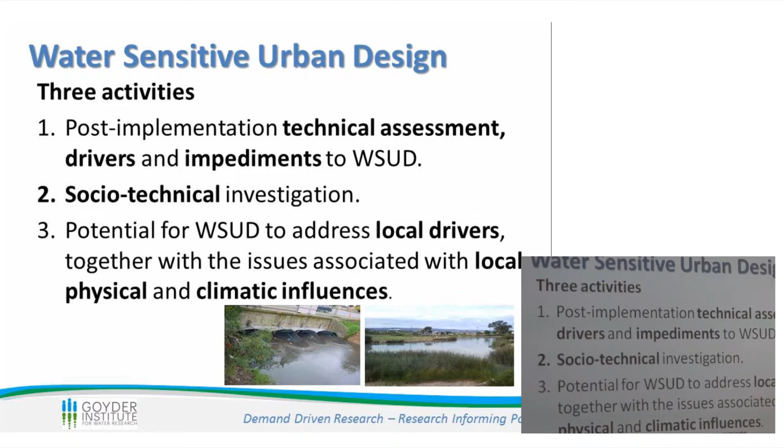This project has three main activities. Looking at the post-implementation assessment of the existing development based on water sensitive design, identifying the drivers and the impediments. Socio-technical investigation, going back to the community and asking what issues they think about the systems. And the third is looking at the potential of WSUD based on the local drivers and also with the local physical and climatic influences. So this is what we are covering, and I will be putting some information about these activities. Basically, we are looking at multifunctionality, water conservation, flood mitigation, and the water quality aspect.

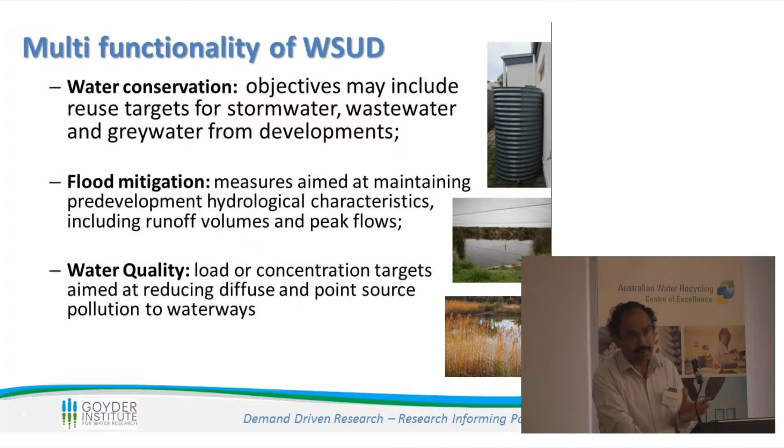In task one, we developed an inventory of what type of systems are there in the Greater Adelaide region, and whether these systems are working as they're designed for, and asking about the impediments from conceptualization to maintenance and operation, and then also mapping the various stakeholders for water sensitive urban design systems. In the first part, we investigated around 202 WSUD systems, and we have mapped them in a GIS form that will be available through the web. We are talking to the NRM board to put that on the web. So that has already been done. A report has been developed, and that is also available on the Goyder website.

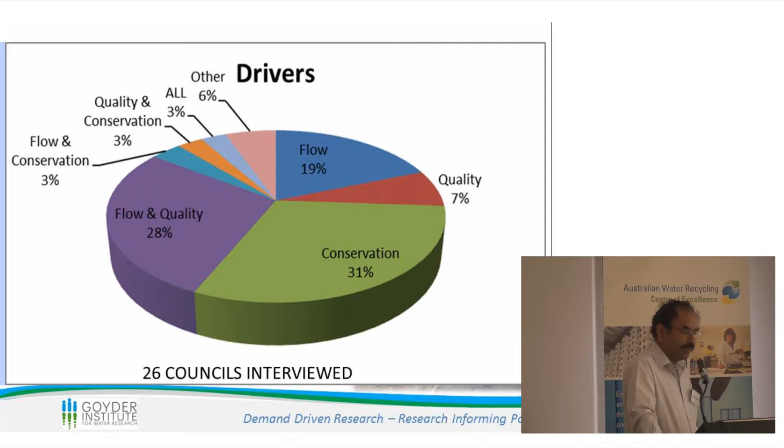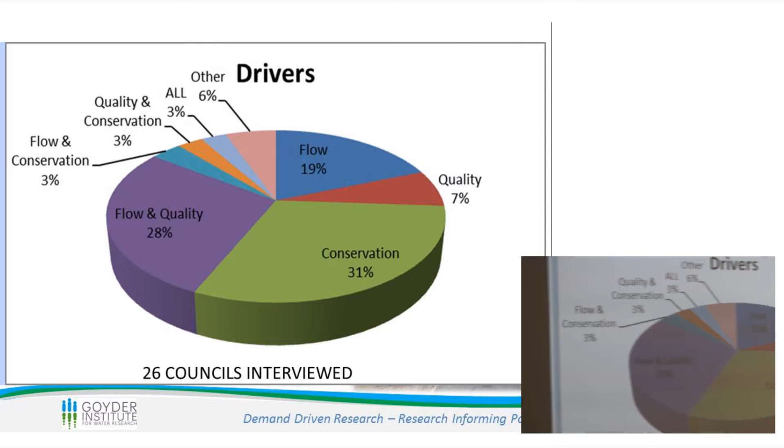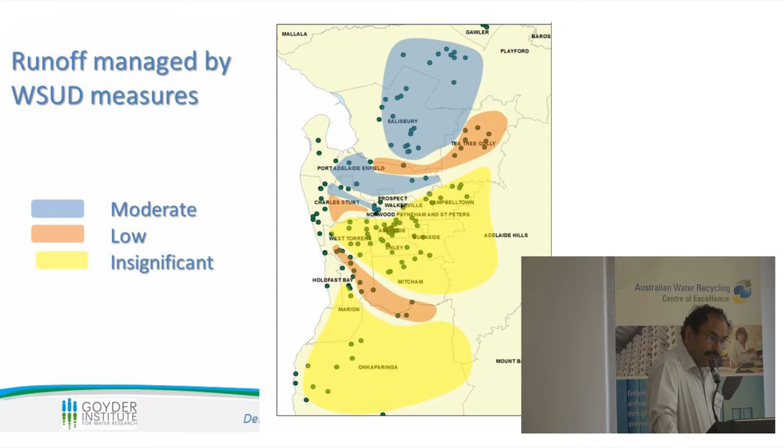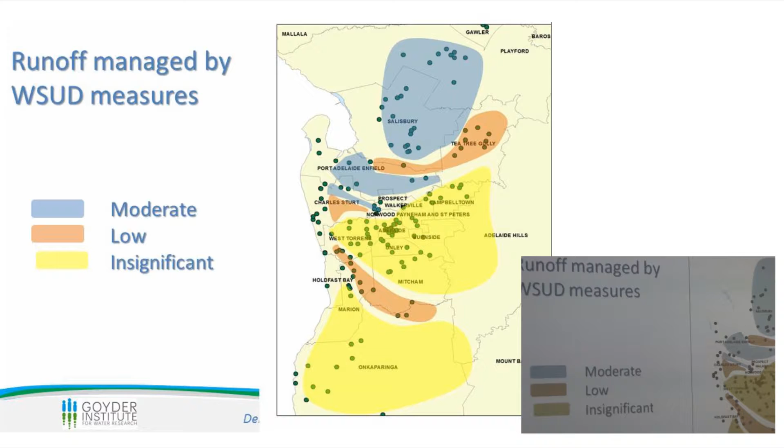We tried to put it on a map based on the number of WSUD measures which are already there, and where these systems are making more impact on the runoff. And you can see on the top, the dark one is the Salisbury area, where most of the schemes are for stormwater reuse. To do the post-implementation assessment out of those 202 sites, we developed a number of criteria, and based on that, we selected 6 sites to cover various aspects of WSUD systems. And these sites were also used for the socio-technical investigation.

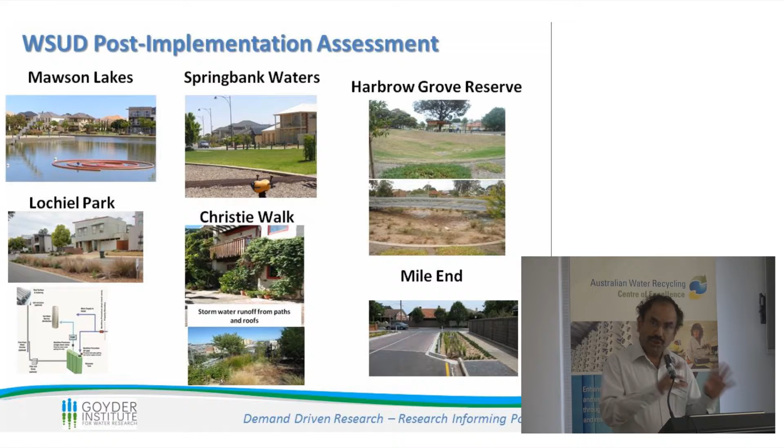Also, we talked to the various stakeholders and developed a mapping of who are the primary, secondary, and tertiary stakeholders. As you can see over here, the residents should be the primary stakeholders. But in the greenfield areas which are developed, there is no community there. The decisions are taken by someone else. That's why we went to those communities and checked with them what they feel about those systems.

We are in the process of finalizing a report on task 1, which will be around 250 pages. We have categorized all the impediments and constraints in 6 themes. I won't be going through all the 6 themes over here, but that report is almost ready to be circulated among the project reference group members within a week or 10 days' time. That will cover themes like adoption and implementation issues, the fragmented approach, the knowledge gaps, the perception of risks and cost, and what the community is thinking. From task 2, we have brought that into task 1 to make it a complete picture. So that report is almost ready and will be circulated very soon.

Task 2 is about understanding the perceptions and the drivers that the community thinks about these systems. So we went to those 6 development sites locally, and through focus groups and talking to the community, we have developed a report.

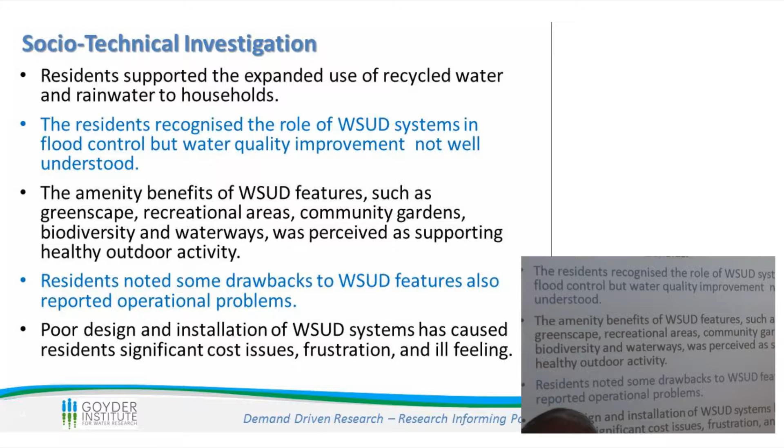That report has been reviewed by the project reference group. It is with our steering committee members, and hopefully that will be in the public domain very soon. In this report, we are talking about the community, what they think about it. They have an understanding about the system.

They are supportive of water recycling and rainwater usage, but they also understand the amenity values of these systems, and they recognize some aspects of water sensitive urban design, not fully. Especially they know the flood mitigation part, not the water quality part. But they are talking about a number of issues, and those issues are more about operation and maintenance. And also they are talking about design and installation, because they are looking at the system on a day-to-day basis.

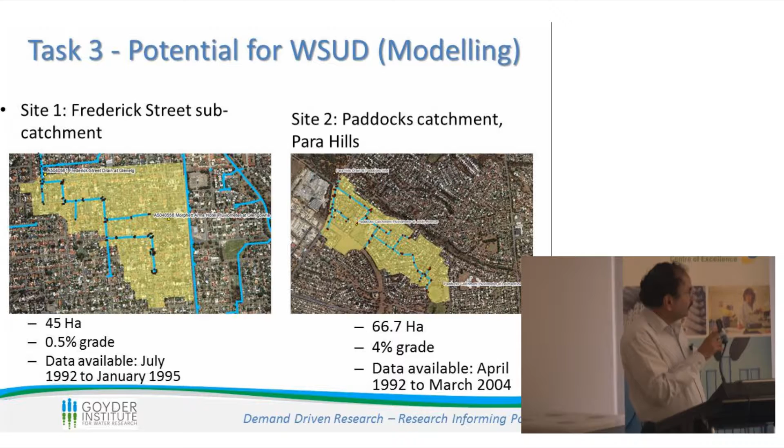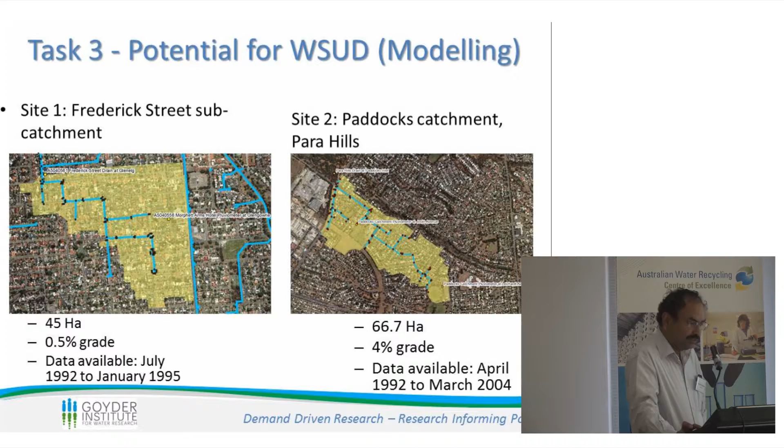The third activity is about understanding the potential of water sensitive urban design, and this is a modeling exercise. We considered 2 developments locally, and we picked the Frederick Street catchment and the paddocks because we have some runoff data about these sites, and we developed the whole methodology for how to investigate the potential. And just to show 2 results, because we are investigating a number of options.

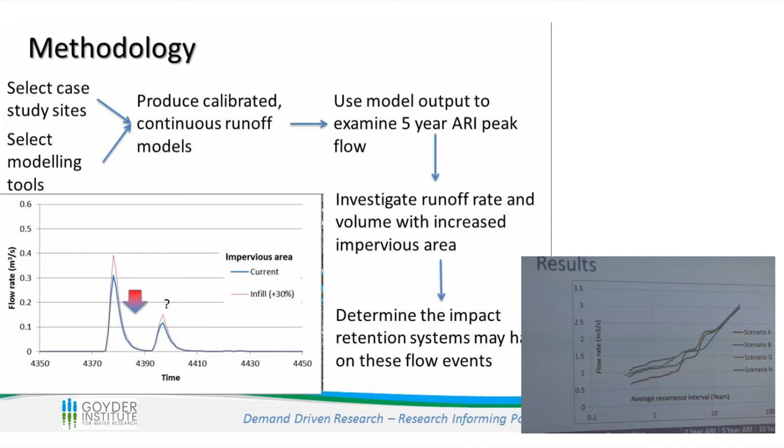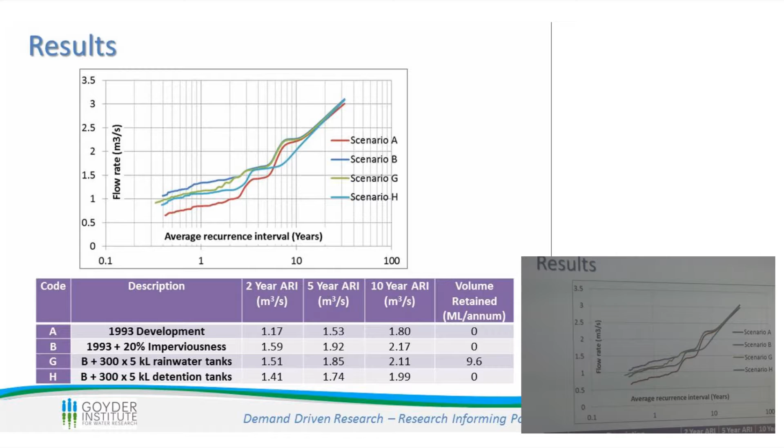Just two options. We looked at rainwater and detention tanks to reduce the peak flows to pre-development flows. The rainwater tanks have the additional benefit of water conservation, but detention tanks are more successful in reducing the flows. Just to show you the performance assessment of some of the bioretention systems, they are good in the water quality aspect, reducing suspended solids, TP and TN. They can also reduce the peak flows at various ARI levels, and they can be good combined with the bioretention system, and that can provide water quality that can be more suitable to MAR.

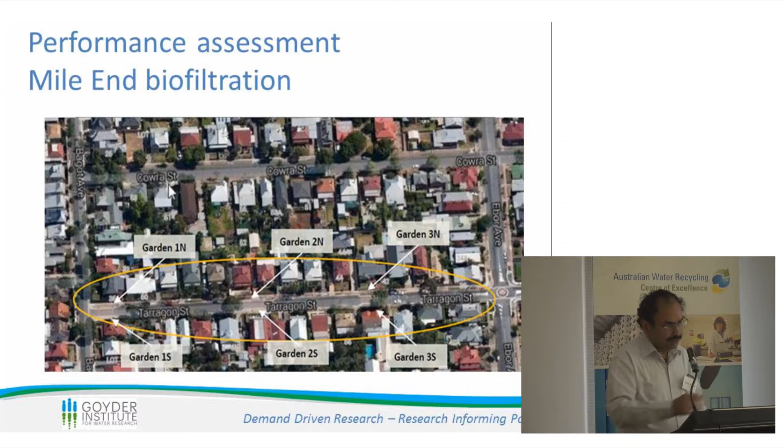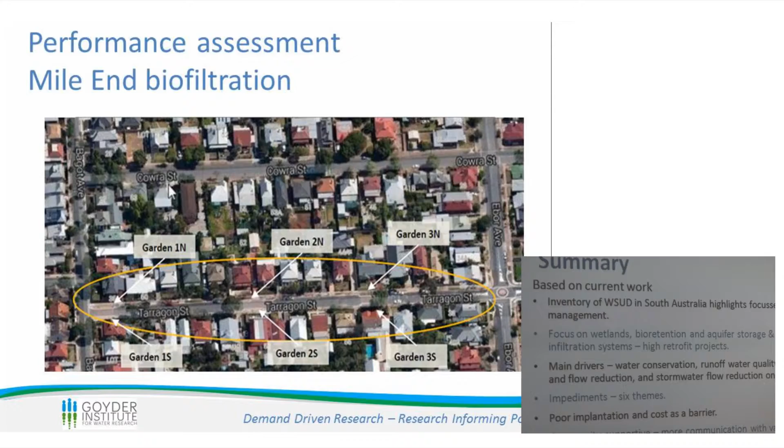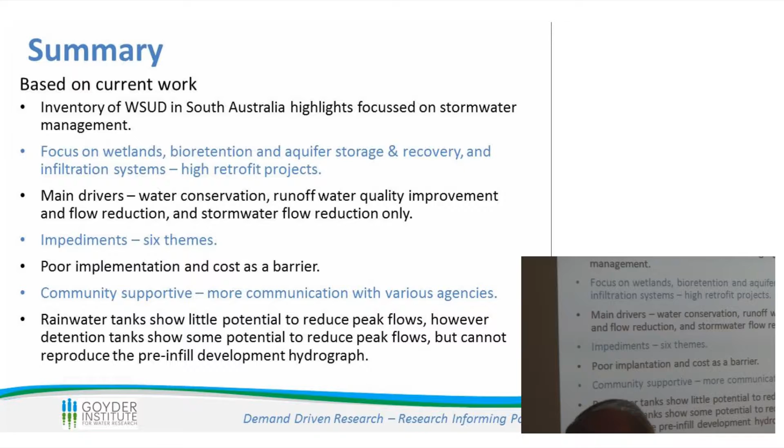In summary, what we have done so far is develop the inventory and identify the drivers, and also identify which systems are being more applied, used and implemented. We have identified the impediments, talking to wider stakeholders, and we have put them in 6 themes. The most important ones are poor implementation and cost as a barrier. The community is supportive, but they need much more information to be educated.

And through the modeling, I think we can say at the moment there are a number of options we investigated, but just for example, I have put over here the rainwater tanks, and detention tanks are more successful in reducing the peak flows, but there are other options too which we are investigating at the moment.

Based on the wider consultation and identifying the impediments, we realized that there are a number of activities or support needed for professionals and local councils, where they can have guidelines for incorporating WSUD into stormwater management plans. There is limited information about how runoff can be reduced. So there is more need for understanding the evidence base on the impact on flooding, runoff, and water quality.

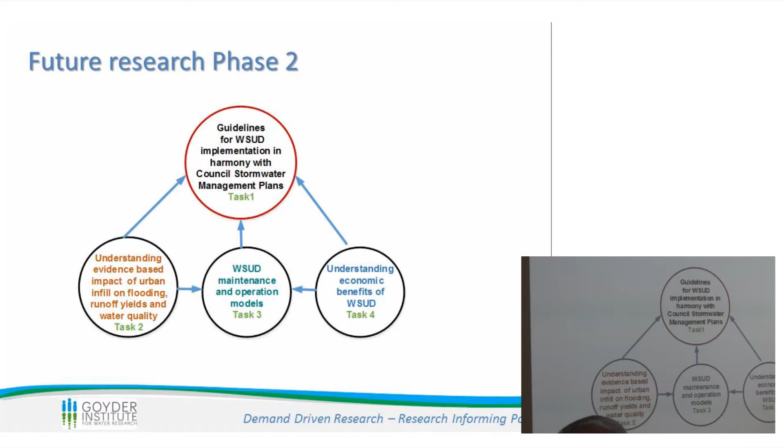The operation and maintenance issues of WSUD are the most important aspect, and we need to understand what models would be more suitable for operation and management, and also to understand the economic benefit of WSUD. So these are some of the activities which we think, based on the wider consultation, will be needed to increase the uptake of water sensitive design.

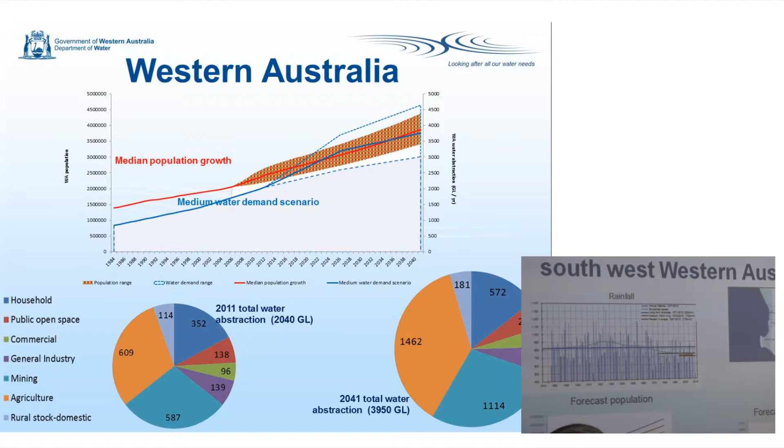And the other driver, in the southwest of Western Australia in particular, is not only that population growth and forecast water demand growth, but we've got a definite drying climate where it looks like every 10 years or so the inflows into storage halve, or the recharge is substantially reduced. And the work that's been done by the Bureau of Meteorology and CSIRO and ourselves looks like that trend's to continue. So that's some of the background and some of the driving forces that we have in WA.

So to lead us through some of the elements of that, first of all, we'll have a presentation about the good. There's been some really excellent work done by the Western Australian Water Corporation in groundwater replenishment, and we're very fortunate to have Rino Trolio here from the Water Corp to take you through, because he's been heavily involved in this groundwater replenishment trial and in water recycling for the Water Corporation. I'm very pleased to introduce Rino.

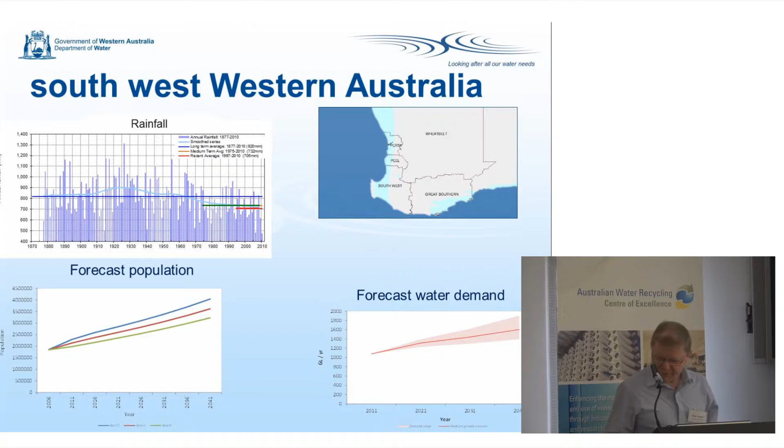All right. And Greg, I've never been introduced as the good stuff, so I appreciate that. I'll have to tell my wife about that.

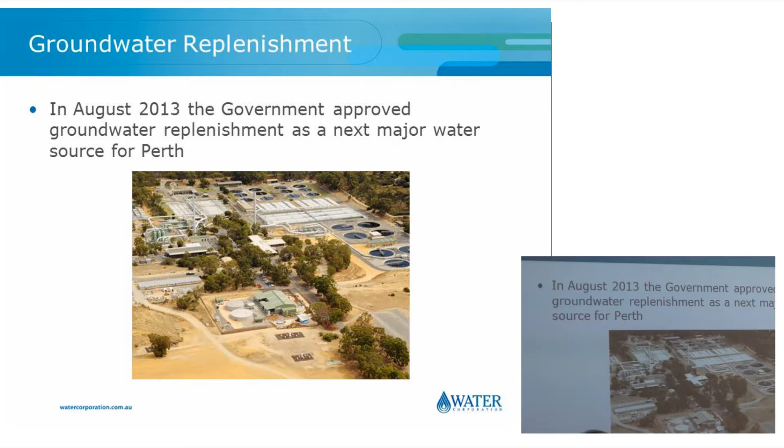So today I'm going to talk about the groundwater replenishment trial, and I'm going to take you through that 3-year journey, but also introduce to you that this is going to be our next source for Perth, Western Australia. So we're really excited in the West. Just to recap, in August last year we all celebrated that the government approved groundwater replenishment as our next major water source for Perth.

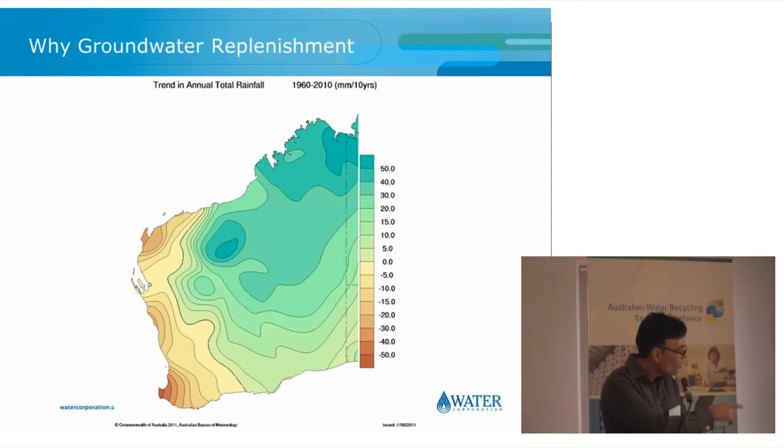Now, why do we want to go down to groundwater replenishment? As Greg showed in his previous slides, Perth's a drying climate. The map of Western Australia shows average rainfall between 1960 and 2010, and there's been a reduction in rainfall. In the southwest corner of Western Australia, rainfall has decreased by 30 to 40%. This was further accentuated by the winter of 2012, the second lowest on record.

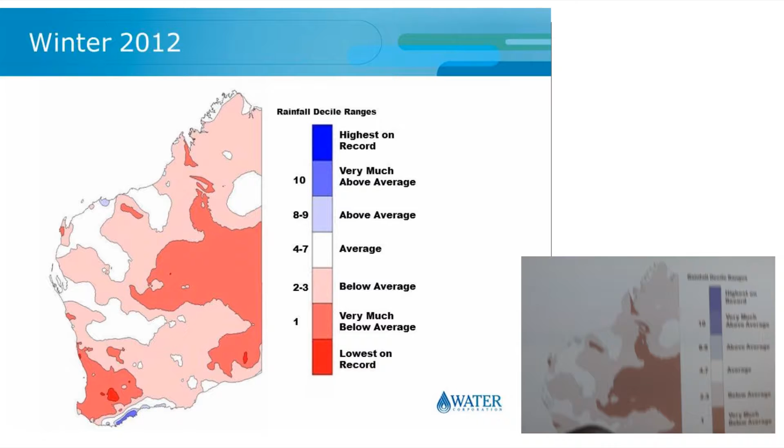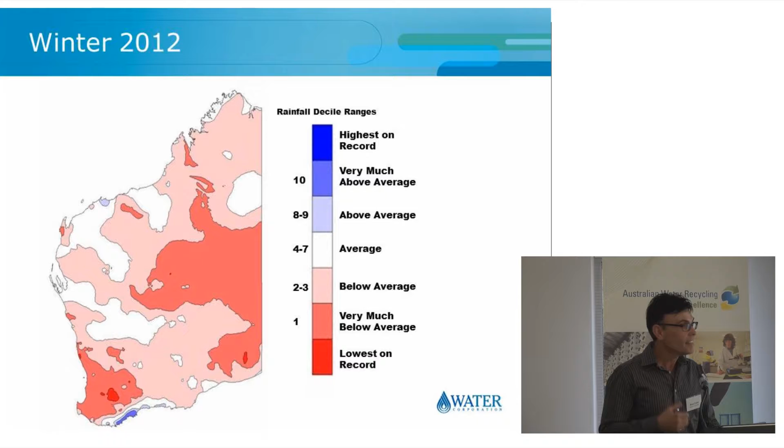Again, the map shows that rainfall has been below average, and in certain parts of the state, the dark red, it was lowest on record. This was followed by the driest winter, which was 2010. And I was just reading an article the other day that we've had the driest summer on record in Perth this year. So we haven't experienced the rain that some of you have had in the past 12 months. So we're still in a drought.

So what do we do in terms of planning? How do we move forward? Following those continued poor winters, we revamped our planning, and we've captured that in Water Forever, whatever the weather. That's our planning for the next decade to really drought-proof Perth, and it's available on our website, www.watercorporation.com.au.

So if you look on the left-hand side, what does the plan consist of? Reducing demand by a further 15%, so reduced water use. Recycling 30% of our wastewater by 2030, so taking treated wastewater and recycling it. And developing new sources. Bringing those three concepts together, we're becoming a climate resilient state. And one of those new sources is groundwater replenishment.

So what does groundwater replenishment consist of? I'll walk you through. It takes treated wastewater from our wastewater treatment plant in the northern suburb of Perth known as Craigie; the plant is Beenyup wastewater treatment plant. We take that secondary treated wastewater from an activated sludge plant, and it goes through an advanced water recycling plant. From that, it is now drinking water standard, and we recharge it into a confined aquifer known as the Leederville aquifer, between 120 and 200 metres in depth.

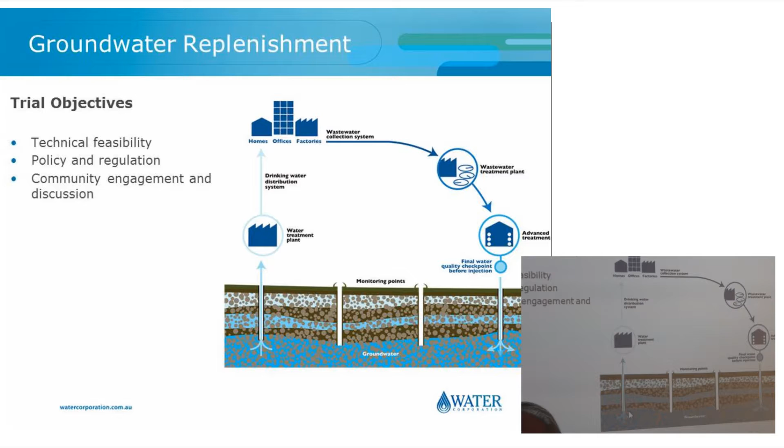Then over time, so over many decades, it will travel through the aquifer and find itself through our existing production bore, which is about 5 kilometres from the actual recharge point. It then goes through a water treatment plant and then into the distribution system. So that's the concept.

So in terms of the trial objectives, there were 3. One was to develop an appropriate regulatory framework with our regulators. And we've got a good relationship with our regulators, being the Department of Water, the Department of Health, and the Department of Environment Regulation. Prove the technology. We had confidence with the technology because it's been used elsewhere in Singapore and California. But our challenge was, can we bring the community along this journey? Will they get over that yuck factor?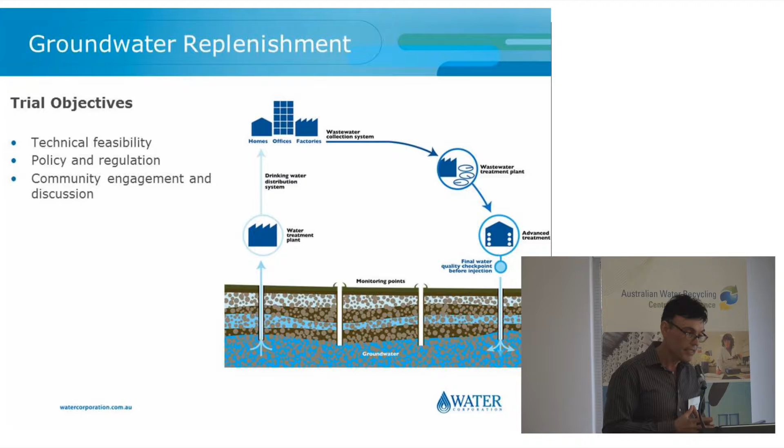So just to go through the dates of the trial, we're now focusing on the 3-year trial. In 2004, we commenced engagement, but it was in 2009 that we commissioned the plant. So it's important to engage with the stakeholders and our regulators. The Department of Health undertook a very sophisticated and extensive scientific review of approximately 400 chemicals of concern. We wanted to know what we need to analyse in terms of chemicals of concern, and could the treatment process remove those chemicals of concern. We spoke to community leaders and the community at length to get their support.

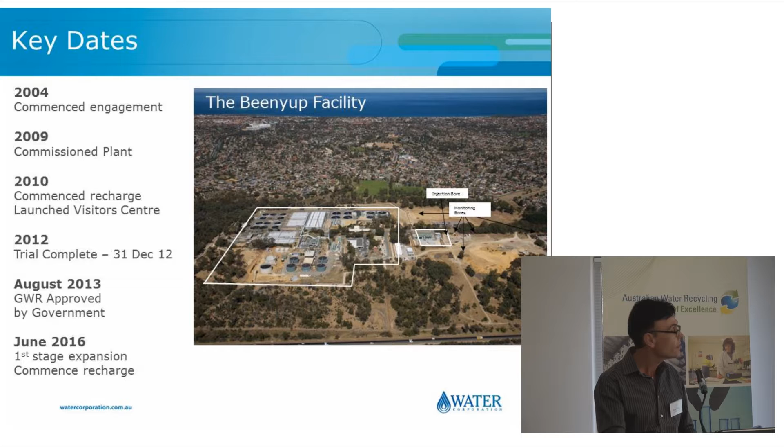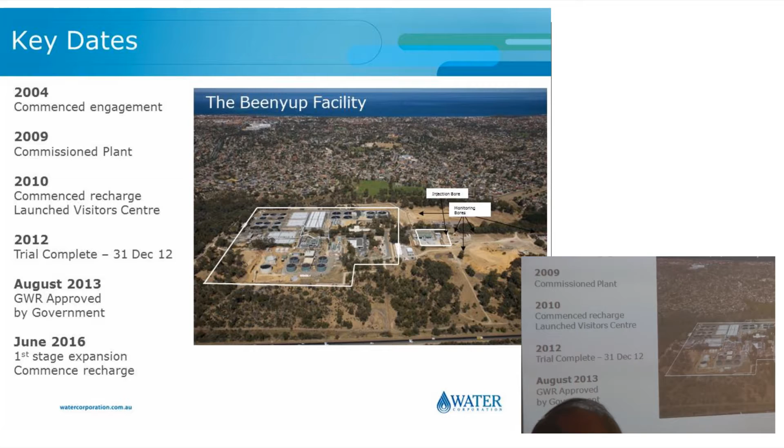So just to walk you through those key dates, we commissioned the plant in 2009. We commenced recharge in 2010, and we launched our visitor centre. Some of you who attended Ozwater in Perth would have gone through the visitor centre. The trial was completed on New Year's Eve, the 31st of December 2012, and there were great celebrations. As I said, the government approved groundwater replenishment as our next source in August 2013, and we'll commission our 7 gigalitre plant in June 2016.

So in terms of the plant, what does it consist of? As I said, we're taking that treated wastewater from Beenyup. It goes through an advanced water treatment process. Initially ultrafiltration, which removes all your suspended solids, your crypto and larger viruses. Moving over to reverse osmosis, which removes chemicals larger than a water molecule. And then finally UV disinfection, that's ultraviolet treatment for your final disinfection step. It inactivates the DNA within the bacteria and viruses. It's then stored in a treated water storage and then recharged into the aquifer.

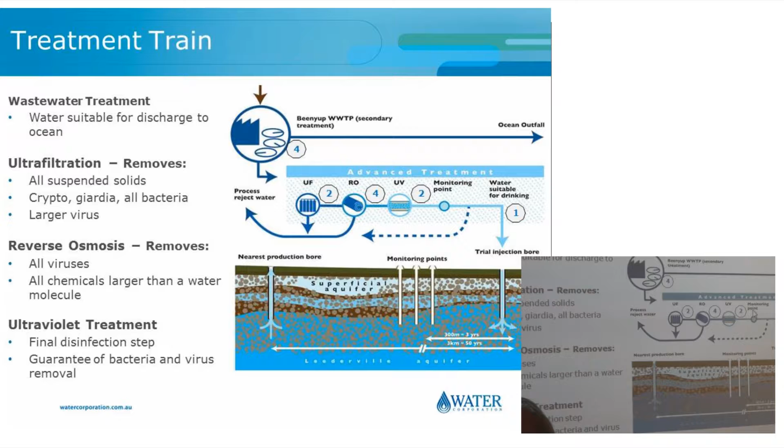So in terms of the treatment process, we have 11 log removal. We're claiming 1 from the wastewater treatment plant, 3 from the UF, 3 from the RO and 4 from the UV. So that equates to 11. And we've done some challenge testing along the various treatment processes. For example, with the RO, we've taken a chemical surrogate known as rhodamine dye, which is much smaller than MS2 coliphage, and we challenge tested the RO, and we were able to show that the log removal was greater than 3. It was about 3.5 to 3.7.

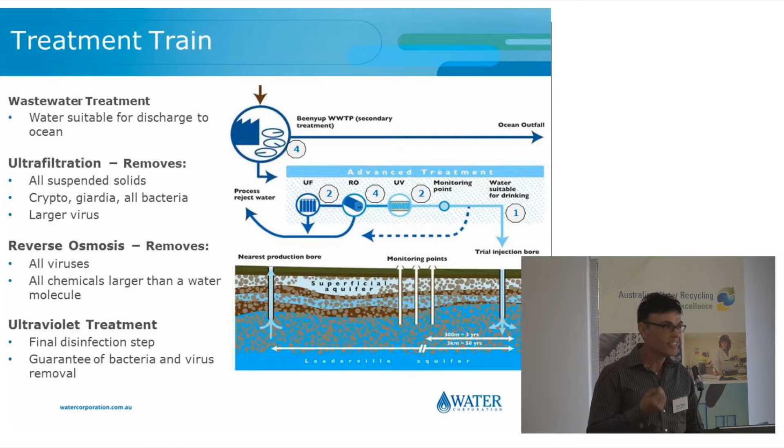So once the water is injected in the ground, of course, you're going to need to take samples to verify that all is safe. In terms of the verification of your recycled water quality, just to walk you through some of the numbers, we took 11,974 parameters through the advanced water recycling plant, 4,104 samples from the recycled water, from the treated water storage tank, that's your regulatory samples, and over 58,000 samples from the bore field. All of these samples met health and environmental guidelines. The cost of the analysis over the 3-year period was 2.7 million.

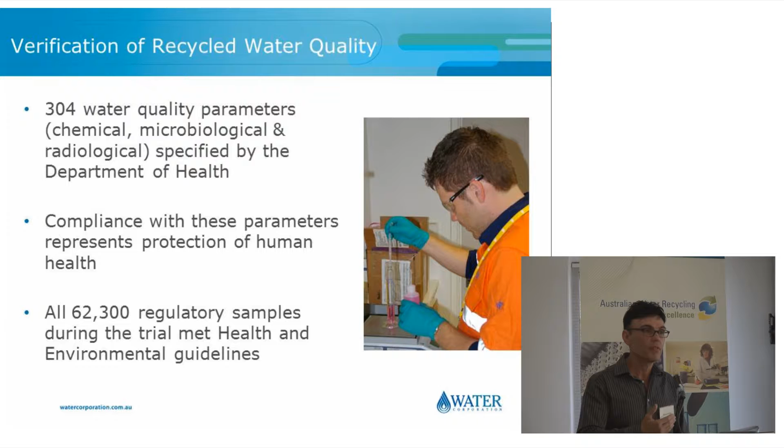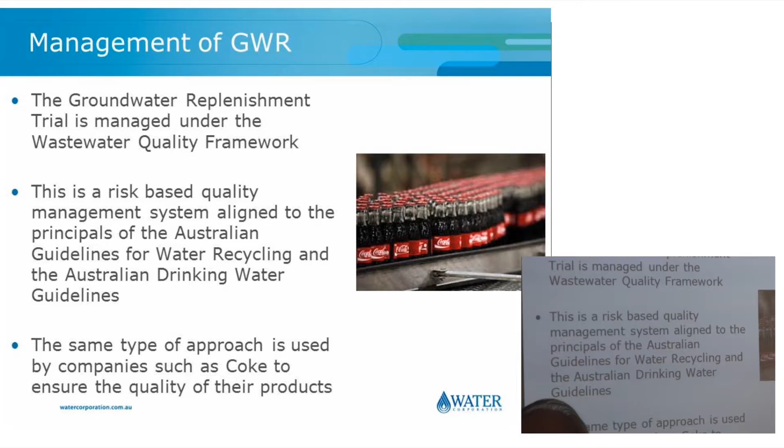So how do we manage groundwater replenishment? What is the governance of groundwater replenishment? We manage it under the wastewater quality framework. So what is it? Well, it's based on the 12 elements of the Australian Drinking Water Guidelines and also the 12 elements of the Australian Guidelines for Water Recycling. We're managing groundwater replenishment through a framework or a quality system, quite similar to what's managed in the food industry, such as Coca-Cola. The wastewater quality framework has been endorsed by our regulators as the industry best practice approach for managing groundwater replenishment. It was also audited by an external auditor, Deloitte, and we passed with flying colours.

So, as I said previously, the only thing that would stop us from getting support from government was community acceptance. So really a vital part of getting the project up was related to the attitudes of the community. And in terms of the community engagement, and I can't stress the importance of this for any of your schemes, our first level of engagement was with opinion leaders and decision makers. We developed a sophisticated and extensive program to identify and engage with stakeholders who are likely to have influence or interest in groundwater replenishment. Now, we commenced this in 2004.

The briefing programs also focus on 2 areas: your regulatory authorities, so your decision makers, and opinion leaders. So our regulators, such as the Department of Water, took account of community attitudes, ministerial direction, and also the industries that are related in providing that direction. MP briefings were undertaken regularly to ensure they were informed when members of the community may go to them with concerns. So we answered hundreds of ministerials and priority runs along that three-year trial.

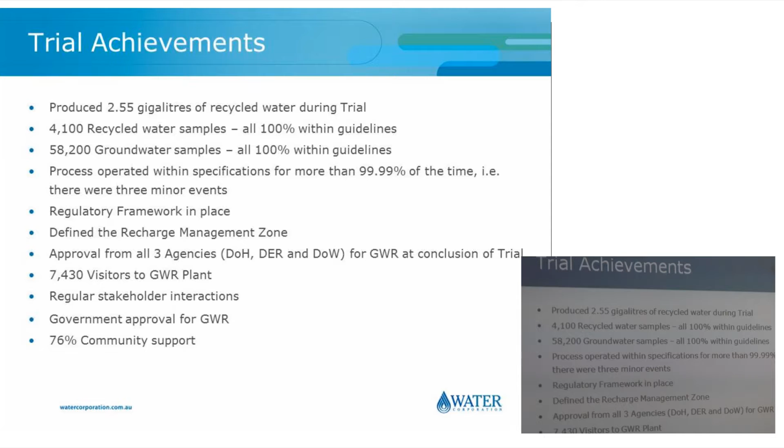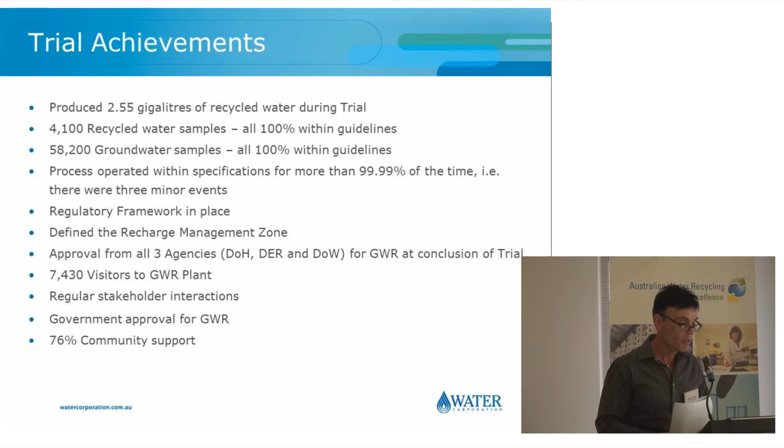So in terms of the trial achievements, what do we achieve? So that's the good. So we produced 2.55 gigalitres of recycled water during the trial. We met all the health and environmental guidelines. We got approval from all the three agencies. We had over 7,400 visitors to our groundwater replenishment plant, regular stakeholder interactions, and bipartisan government approval for groundwater replenishment. So as I said, overall there was about 76% community support for groundwater replenishment within Perth, and that was, of course, due to the drying climate.

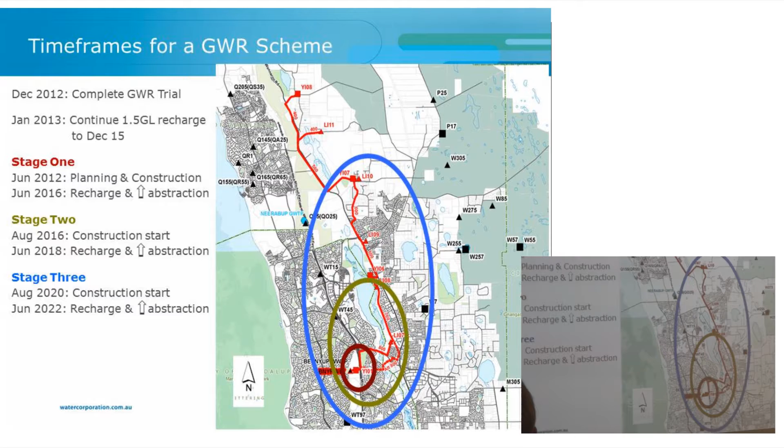So moving forward, what's our next stage? So as I said, in 2016 we'll commission our 7 gigalitre plant. We're looking at stage 2 and stage 3, so that's probably 14 and 28 gigalitres. Staging can be accelerated or deferred depending on the rainfall events. So the aim is by 2022, if necessary, we can be completely climate independent in Perth, Western Australia.

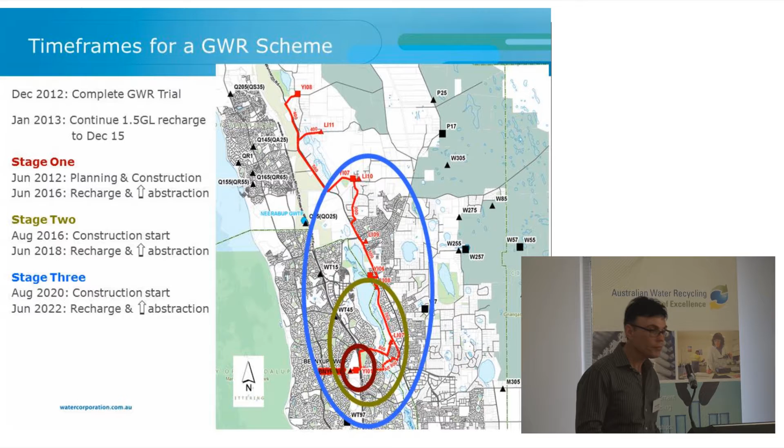Thanks, Rino. And we move straight on to the second presentation, where this is Dr. Don McFarlane from the CSIRO. Whereas Rino spoke about the successes that have been had, particularly in drinking water as being the main use of the water, Don's work is where the main use of the water will be in heavy industry and also hopefully keeping out seawater intrusion risks. And so over to you, Don. Thanks, Rick.

Okay, I'd like to acknowledge my co-authors here as well, including Michael Donn, who's in the audience, and he can answer a lot of the chemical questions if I can't. Just up here on the screen, though, you can see the heavy industry area in Kwinana, which is just south of Perth, south of the Port of Fremantle. This is an area that's, apart from the Burrup Peninsula, the major heavy industry area in Western Australia, and it's experiencing, or going to soon experience, a shortage of water.

About 70% of their process water particularly comes from the shallow aquifer, and the groundwater levels have been falling, seawater intrusion is occurring, and there's other impacts of those falling levels as well, including a lot of the wetlands on the coastal plain. The area around Perth used to be renowned for its lakes and its waterbirds, and they've been decimated really by these about 40 years of dry winters. So I'll be talking a little bit more about the partners in the project a little bit later on.

But first of all, Rino's just given you a great talk about what's happening with drinking water. But when you look at the total water demand around Perth, if you take the greater Perth area, groundwater has been a dominant supply source, and particularly now that the runoff into the hills dams is very small, you could say it's probably about 85%, even though up to half of Perth's drinking water is now coming from desalinated seawater.

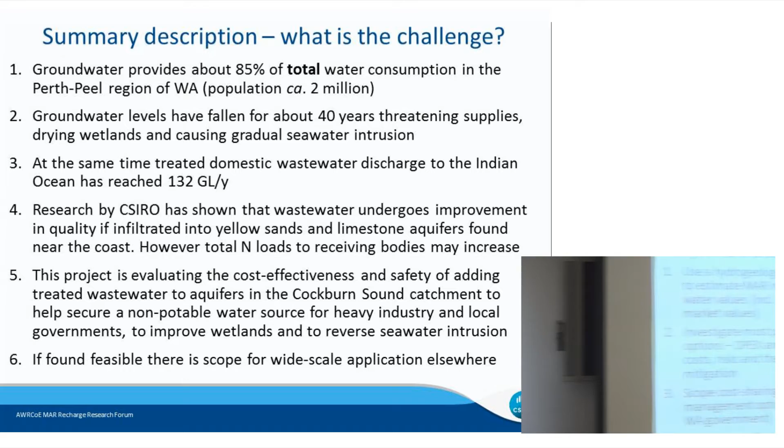So very quickly, the objectives and outcomes for this project. I've got a map here; you can see all these blue lines, these are the isopotentials. Out here we've got the Jandakot Mound, which is part of the water supply for Perth. But you can see a lot of through-flow wetlands around here.

We've got an area where there's a bit of a waterfall where the superficial groundwater hits the Tamala limestone and the transmissivities increase, and therefore the gradients get very, very flat. This area along the coast here, this is Cockburn Sound, this is all the heavy industry. There's a wastewater treatment plant here that takes most of the wastewater for the southern part of Perth.

And I won't go into the complications of it, but there's a Sepia Depression ocean outfall line here, goes all the way down here to Cape Peron, and 54 gigalitres a year goes offshore and gets disposed of. So here we've got heavy industry, we've got lakes, we've got urbanisation occurring through here. And so the option is, can we take some of this water that's flowing past heavy industry and these lakes and put some of it back into the aquifer?

So the major effort we've got at the moment is actually building a groundwater model that's detailed enough to look at all of the scenarios. So if we would divert some of that water and put it into the aquifer here, what would be the impact on groundwater levels, and could we save a lake or produce water for industry or push back the saltwater interface? Then once we've identified 3 or 4 or 5 options, we're going to get the capital and operating costs of those, look at the risk mitigation, and who the beneficiaries would be from those MAR options.

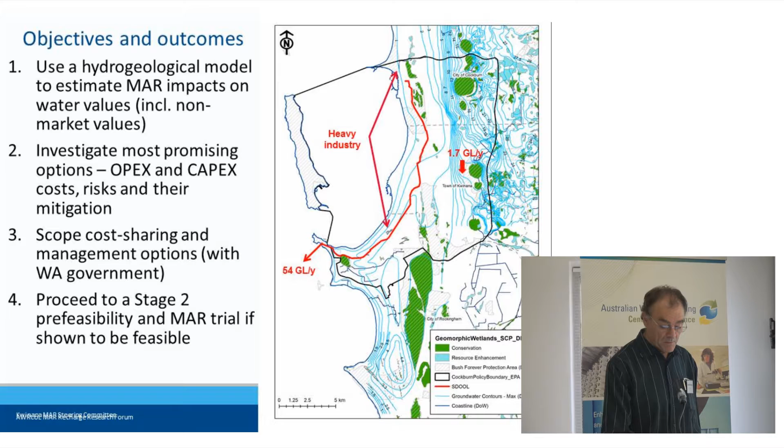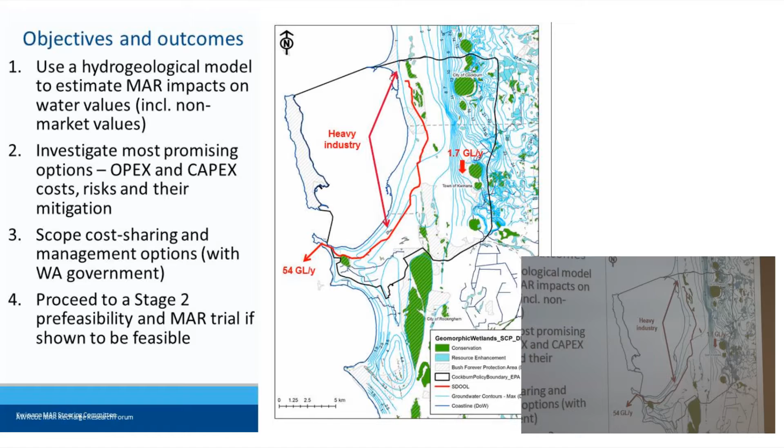Now, before I move off this slide, I just want to point out there's 2 wetlands here, which are called the Spectacles, because they do look like a set of spectacles. At the moment, the Kwinana wastewater treatment plant produces wastewater, and it just allows through infiltration basins 1.7 gigalitres a year. And that's one of the areas that I want to come back to, but I just wanted to point it out to you while we had this slide up. In fact, this is the slide I was wanting to do.

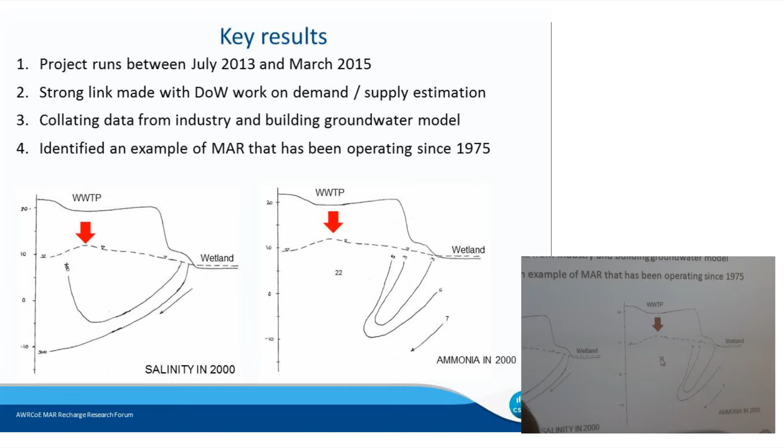And the concern is, if we put that water in, and this is only a matter of 400 or 500 metres away from the wetland, will that water go back into the wetland, and particularly will the nutrients go back in and cause a eutrophication problem? So in this project, we're going to do some much more detailed investigations, and fortunately there's some very good monitoring bores there that we're going to get detailed data from. And you can see that at the moment ammonia levels are very high, and we want to look at whether we can get some systems going to denitrify it.

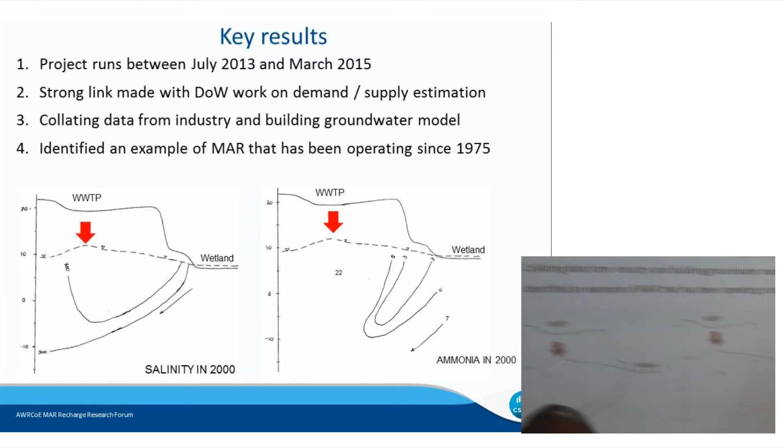So I won't go into that anymore, but these were data from 2000 when the amount of water going into that aquifer was only half of what it is at the moment. We haven't analysed the data for what's actually happening at the moment.

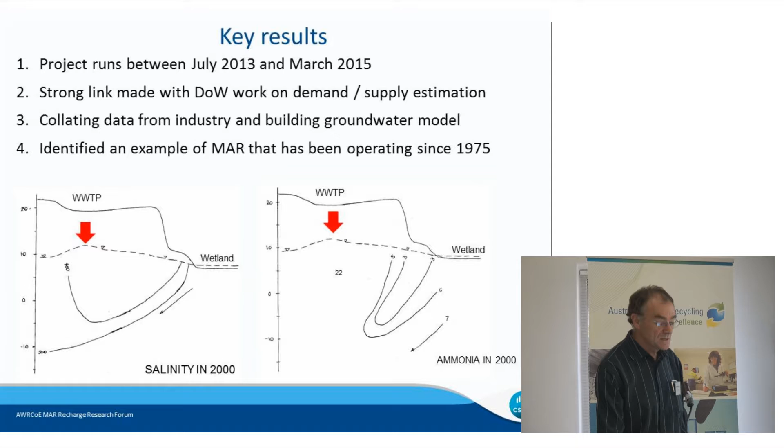So the stakeholders. This is very much an industry-focused project, obviously, if we're looking at water supply for industry, so the Kwinana Industries Council, which has got 11 full members and about 27 associate members, is a major player in this. The Western Trade Coast is a government agency that is looking at not just the heavy industry but also the light industrial areas around this area.

The Department of Water is working with us on licensing, planning, reuse. Water Corporation obviously is the operator of the wastewater treatment plants and very interested in reuse and disposal. The Health Department's involved. And to take on board this need to get the community on board, we've got the Cockburn Sound Management Council and a whole lot of regulators and local governments involved.

This is pretty well my last major slide, and I just want to start from the right and work left, but this is actually the catchment areas. Those different colours there are the catchment areas for the major wastewater treatment plants in Perth. The little arrows and the numbers show how many gigalitres are going offshore in ocean outfalls. So up at Alkimos last year there was about 2 gigalitres, at Beenyup 49, Subiaco 24, and this is the 57 coming out down here.

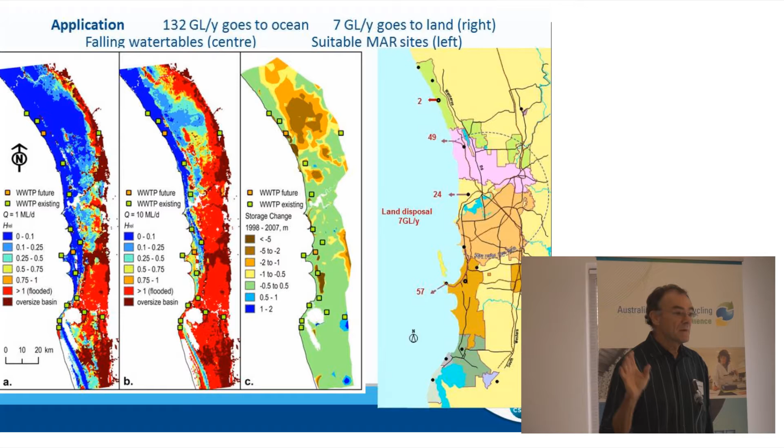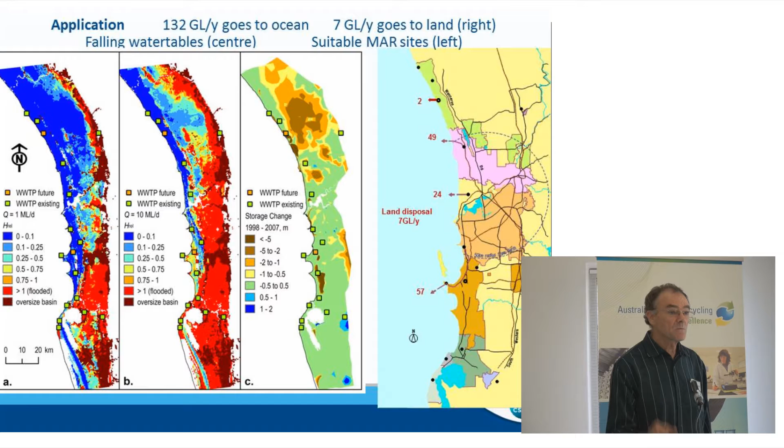So this is Cockburn Sound down here. But you can see a lot of dots here which aren't connected up to an ocean outfall. And these are the areas, like the Kwinana Wastewater Treatment Plant, where they actually infiltrate the water back into the aquifer. So this is managed aquifer recharge for disposal of wastewater rather than for reuse. But if we can investigate what's actually happened over a period of up to 40 years of putting treated wastewater back in as a disposal mechanism, can we answer a lot of the issues about what would happen if we were to divert it for reuse?

This map here is really showing the fall in levels. The darker the colour, the greater the fall in groundwater storage. You might be surprised to see some of these very dark areas are actually very close to the coast. And this is because the saltwater wedge is coming in, so the storage is being lost because the wedge is coming inland.

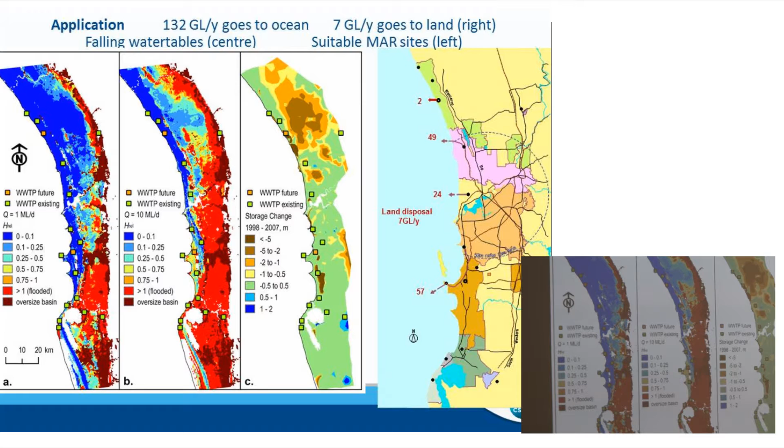And then Tony Smith and others have done some really good work on trying to identify whether there's capacity in the aquifer to allow, in the case of this one, 10 megalitres per day of managed aquifer recharge without raising the groundwater levels too much. And we're looking at areas where, one, there's capacity, but in some of these areas we actually want to raise the groundwater levels back to the surface to reclaim some of these lakes.

We want to know whether it's actually going to be as cheap and abundant as groundwater. We know that the licensing at the moment is being cut back. At the moment we're competing against a resource that's traditional. And we want to look at this wastewater disposal to land as a de facto MAR to see what we can learn about it. So is it going to be cost effective? Can we manage the risks of clogging, contamination, nitrogen to the satisfaction of everyone? And if someone's going to invest in MAR, can they be absolutely sure that they're going to get a credit for the fact that they put that water back into the system?

And then we're looking at who's going to pay. If the industry uses the water, then they should be paying. That's one of the options. But if the beneficiaries are broader than that, because you're reclaiming wetlands and stopping saltwater intrusion and doing all those other things, then the beneficiary pays. Or should government and the community be a free rider on a user-pays system? And so all of those direct and indirect benefits, including the non-market values.

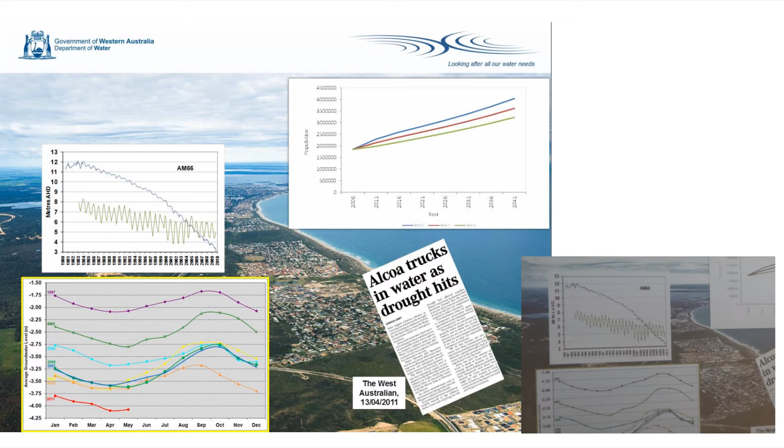Thanks, Greg and others. So this is not the ugly, this is the challenges. By way of a very brief context, given everything that Greg, Rino and Don have said, the easy land in Perth has been developed for urban communities. The high and dry areas have already been developed over the last 50 odd years. We're looking at significant population growth, declining groundwater resources, and obviously declining rainfall.

We undertake drainage and water management planning because what we have to do is think about things differently. How are we going to develop these areas? How are we going to facilitate livable communities while ensuring water is managed appropriately to protect infrastructure, life, and water resources? We do this within state planning frameworks.

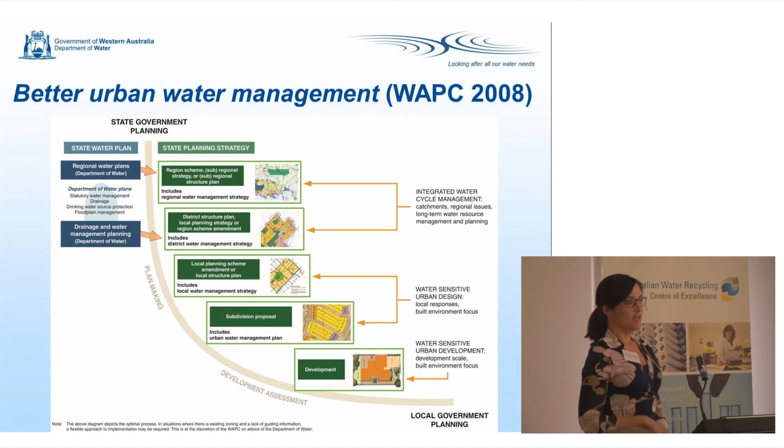There's an integrated land and water planning framework that we work within that was put out by the West Australian Planning Commission in 2008, and that actually defines, right here, drainage and water management plans, which link the strategic water planning and the land planning with the statutory land planning process, and that allows us to get in early to identify constraints for water and opportunities of how we're going to facilitate these communities.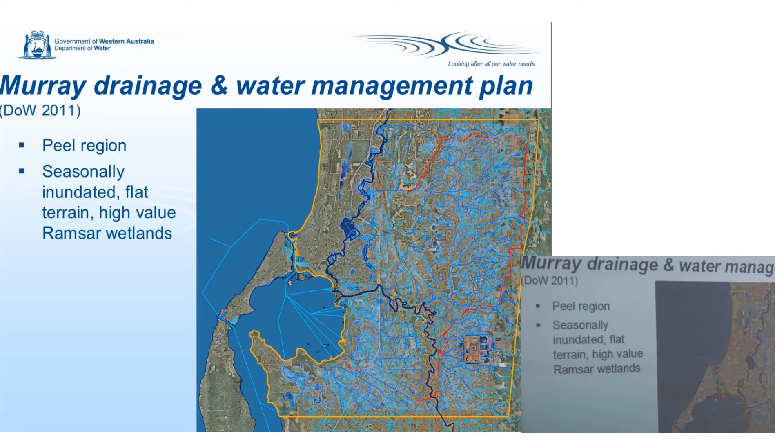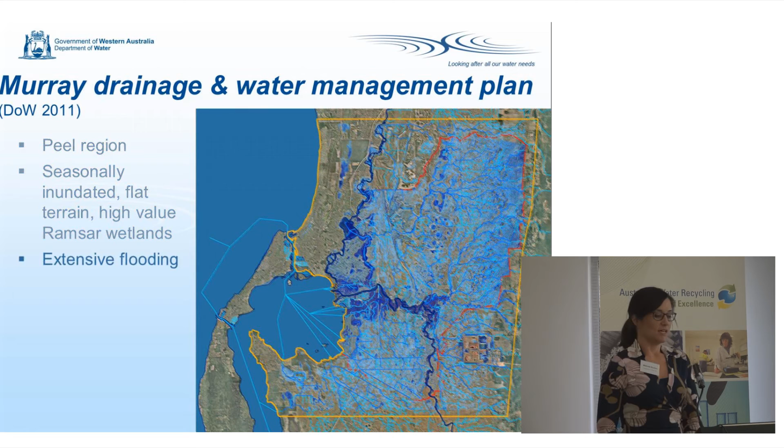So a big part of our workload over the last 6 years and quite a bit of money invested is the Murray Drainage and Water Management Plan area. It's approximately 400 square kilometres to the east and north of the Peel Harvey Inlet, which is on the left of the image there. It's quite flat. It's seasonally inundated, as I mentioned before, and at the bottom of it is the Peel Harvey Inlet, which is a Ramsar listed wetland, which has declining health at the moment. It has extensive flooding regimes across the area.

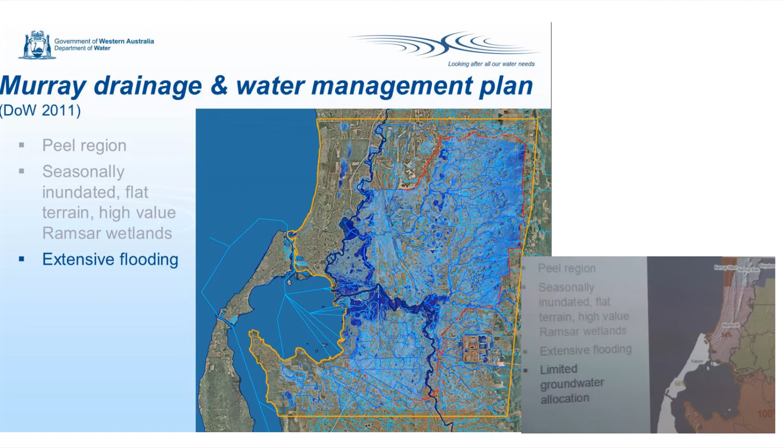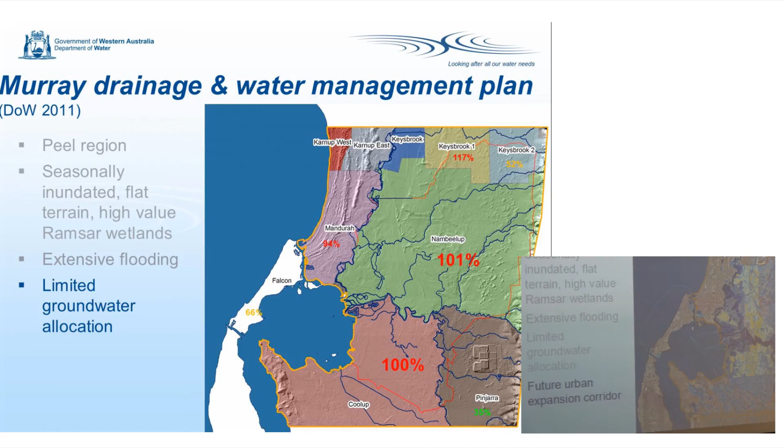Basically, the water falls off the scarp to the right of the picture and sort of just braids out right across the Swan Coastal Plain there. There's limited easy water that's available. Groundwater allocations are nearing or at full allocation limits, and it's prime urban expansion land. So the yellow bit that you can see in the picture there is proposed development for a city of 3.5 million in 2050.

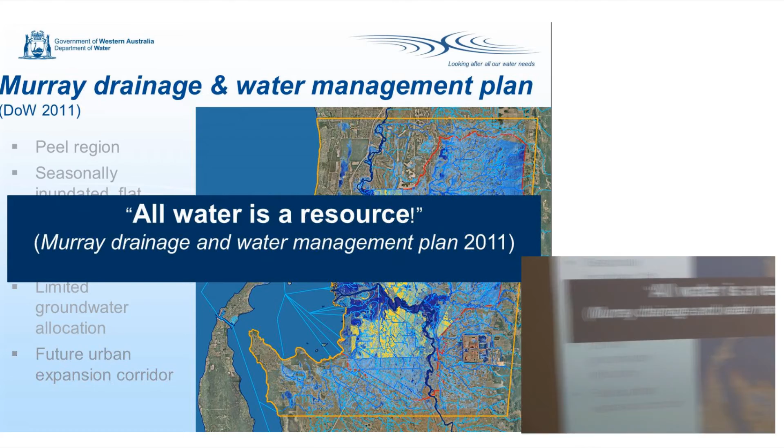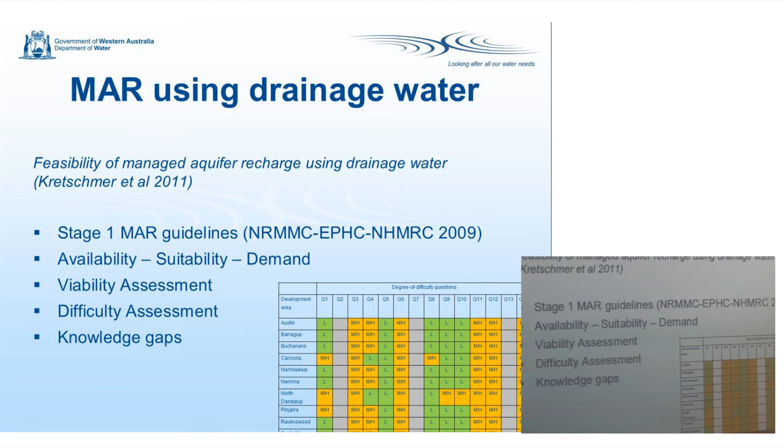The Drainage and Water Management Plan thought, right, traditionally we've been a drain and dispose culture. That's the way we're going to manage water, but in actual fact all water is a resource. We did, as part of the Drainage and Water Management Plan, a feasibility study of managed aquifer recharge using water that we could collect from the drainage system. The reason we did that is because we identified the constraint of the soggy land and the flood waters, and wanted to marry that with the opportunity of providing a fit-for-purpose source.

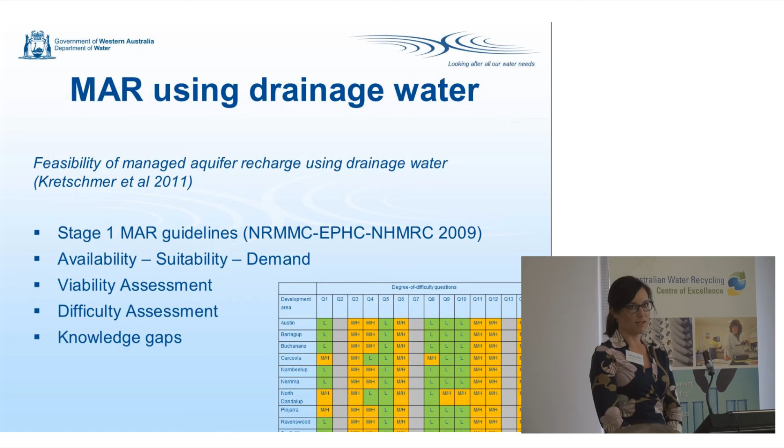The feasibility study was actually done by Peter Kretschmer, who is an Adelaide person and is now back working in Adelaide. He worked with us for a number of years. It follows the Stage 1 MAR guidelines and addresses the availability, suitability and demand questions, and has a look at the viability and difficulty assessments, and then identifies the knowledge gaps.

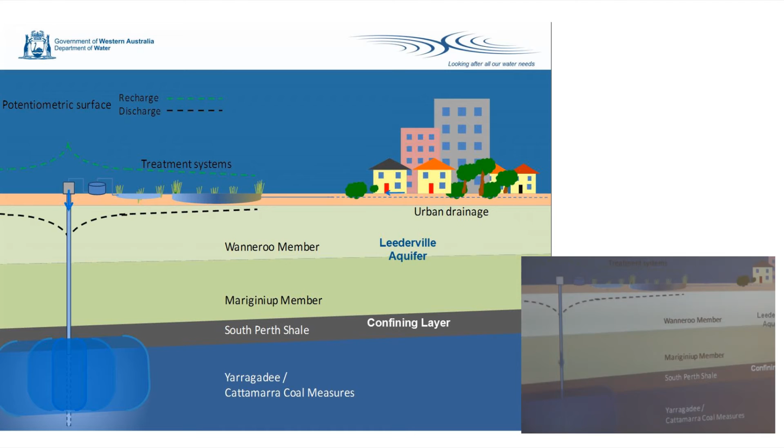So basically, the idea is to harvest water from the drainage system that would be required for urban development to proceed, treat it in some specifically designed wetland systems, and inject it down into the deep aquifer. The reason we did that was that the superficial aquifer is quite full and we're trying to reduce the maximum groundwater levels.

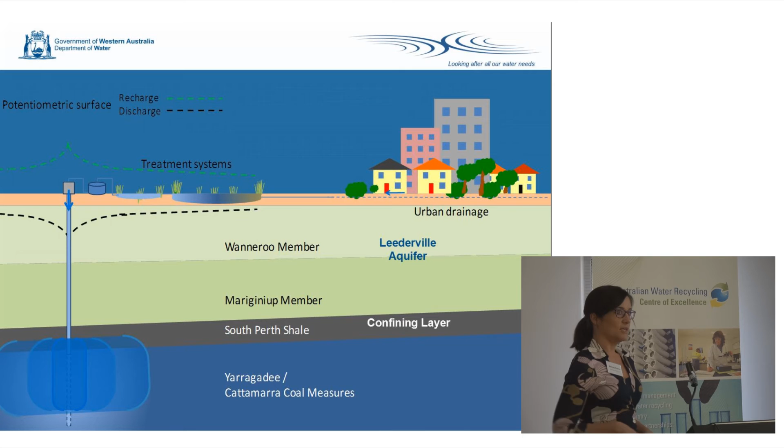The Leederville aquifer was a drinking water aquifer, so what we thought is this is an opportunity to really look into what's the treatment required for a non-drinking water source. Do we have to treat it to drinking water levels, or can we reduce the treatment costs and put it down into an aquifer that's not used for drinking water, so that we might marry up some of those reduced treatment costs there. Then to bring it back up in summer for irrigation of our public parklands and to create those livable communities that we're looking for, and also for industry and agri-precincts.

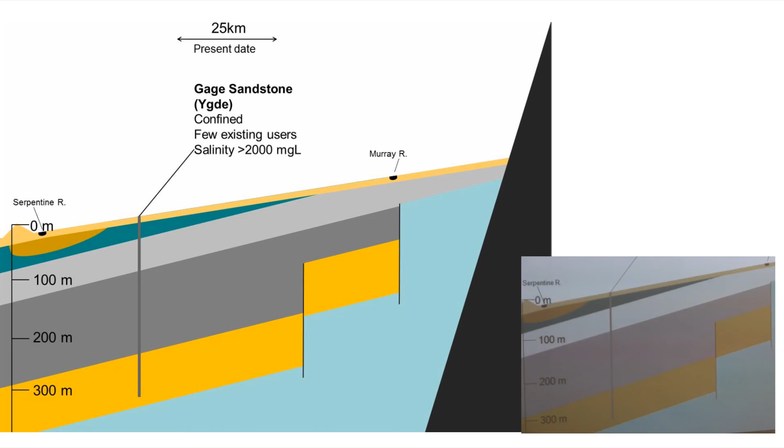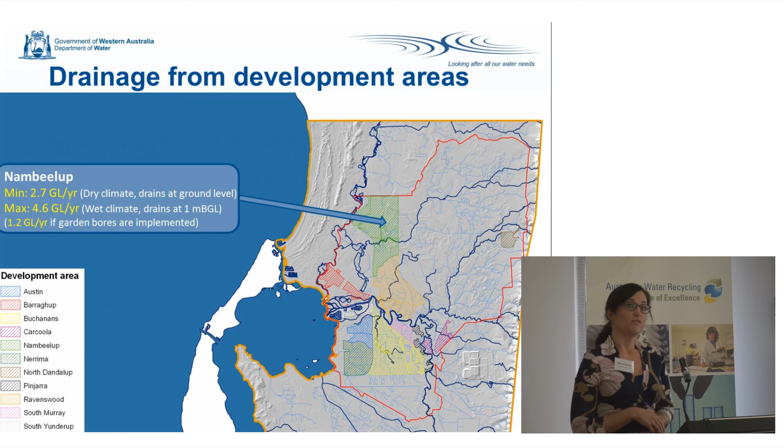So that's just a bit of a snapshot of the geology of the area and where we thought we might look for the injection of the water. We did some modelling to work out how much water might be available through the drainage system, and this takes into account environmental water flows and also stormwater harvesting due to the change in the water cycle when development goes ahead. So across all of the shaded areas there's between 12 and 24 gigs that might be available under different climate scenarios and different development designs. And for the Nambeelup area, which is the project that I'm specifically talking about today, there's between 2.7 and 4.6 potentially, given our regional modelling predictions.

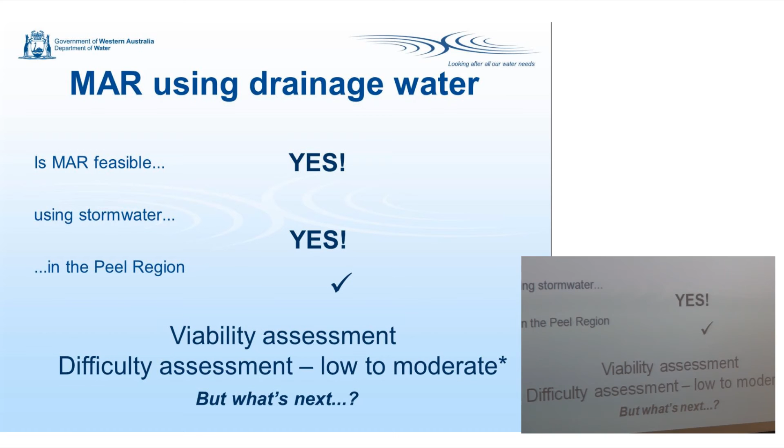So the feasibility study determined that yes, we're pretty sure it's feasible. Yes, it's using stormwater in the Peel region. It has significant benefits for the environment as well by stopping the release of high-phosphorus water entering into the Peel Harvey estuary. Difficulty assessment was low to moderate. So we thought, what's next? The Nambeelup Managed Aquifer Recharge Project. The Shire of Murray have got on board with this, and they like calling this the Nambeelup MARS, or just the MARS, the Nambeelup Managed Aquifer Recharge Scheme.

So stage one of the project is to address knowledge gaps, look at some aquifer testing and some detailed design and perhaps some governance arrangements that might be required as part of a full-blown scheme. It would facilitate growth in the region that has significant water challenges of having too much water but not enough water, and provide environmental outcomes. Also, the information would benefit future managed aquifer recharge schemes in the area, and talking with our stakeholders, they're quite interested in this opportunity. Potentially the scheme in its full-blown capacity would provide up to 7,000 jobs in the Nambeelup industrial estate, and perhaps another 1,000 to 1,200 in agri-precincts that would be dotted around the Peel region.

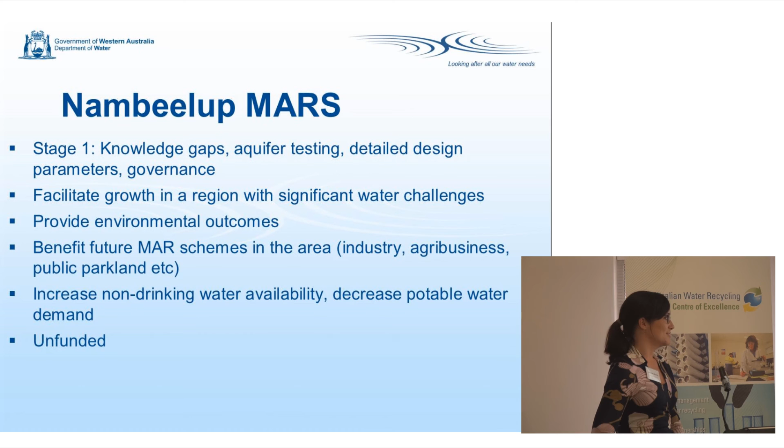Unfortunately, it's unfunded at the moment, not from lack of trying. There were obviously a number of reasons why that is. We're planning this. We're looking forward to potentially what we will need in 2030 and beyond. So there's perhaps not the immediacy of demand. We have significant knowledge gaps and the associated risks that come with that. The foundation customer is not secured because we are just in the planning stage and we're trying to be proactive, but we're in that point where we don't have the customer, but we're trying to stay ahead of the game. And an important aspect is the alignment of structure planning, the land development industry and MAR planning to ensure that we're not trying to retrofit infrastructure and that it all happens at the right time.

So the other experiences in Western Australia, there are quite a few. Perth Airport looked at collecting stormwater and infiltrating into the superficial aquifer. Again, that's quite full. They also looked at potentially transferring some of that water into the local government area, but it was deemed that the infrastructure requirements would be cost prohibitive. Prairie Lakes was unsuccessful for a number of reasons. That was recharging water in and around the Prairie Lakes wetland systems, which were drying. A number of funding, institutional and technical problems halted that one.

The Hartfield Park, which is in Forrestfield in the foothills of Perth, is looking at taking water from a drainage system and infiltrating it or injecting it. They're into their stage 2 assessments and working out what's the best in terms of injection or infiltration, and that's for watering of golf courses and other public parkland. And also we have quite a few managed aquifer recharge schemes in the mining industry. Cloudbreak Mine, for example, the Fortescue Metals Group is recharging 25 gigs per year, looking to expand that to over 100, and that's mine dewater that they're putting down into the deeper aquifers, and that's becoming increasingly common in our northwest. Thank you very much.